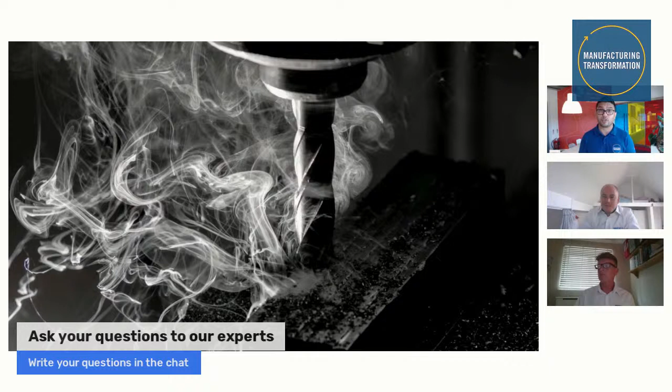So first, let's try to understand how to identify some of the important issues while manufacturing complex parts. To begin with, from my experience, I'd like to share 4 important recurring issues when machining complex parts. Nobody likes to see smoke while machining complex parts, so let's get into the issues as quickly as possible.

The very first issue I've identified is not meeting expectations. Focusing on the machining or entire manufacturing process, we have a number of stages, right from the design department developing a CAD part and handing it over to the production engineering team, where they define the process, do the programming, post the right codes to the machine, and finally cut the first part.

During these different stages, we have to make sure there is something called trend knowledge that is required to fill the gap. Sometimes we are adapting traditional knowledge or methods for machining complex parts, and that could be one of the major reasons for not meeting your expectation.

As I mentioned about the different stages, if you are not making a connected process and not bringing that agility, a very obvious issue I've observed is a lack of efficiency. This is a very common issue when we don't see the connectivity between these different stages.

With today's pandemic situation, everybody is under a lot of pressure to control costs, and your customers are also looking for technologies they would have expected only after 5 years. I think this is a time everybody has realized we have to adapt this quicker. With these pressures, cost is becoming one of the main factors for every shop floor.

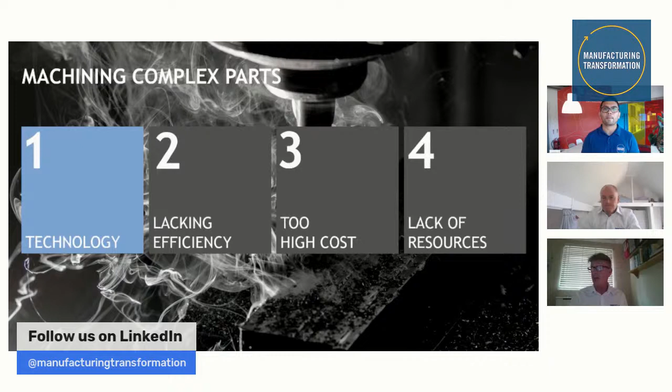Very interesting point, thanks Neil. And I think that summarizes that you need to have the right technology to drive the complex part. And it's very important to understand, as we have this kind of knowledge available in the market, and at the same time when we have this issue called lack of efficiency.

So now I straight away move to Jason. So when it comes to machining a complex part, how important is it to identify this issue, and what is your recommendation to overcome this lack of efficiency, Jay?

Thank you, Janardhan. Obviously, make the process more efficient. What we're really talking about is optimizing your process. There are many ways to do this, and I suppose the main two for us that we drive for are reducing cycle times and reducing the number of times the operator has to intervene inside the operation.

So by doing this, that can lead to much more robust and stable operations and conditions, which leads to better parts. And if we reduce the cycle times, it also creates more capacity. And the more capacity you have, the more space you have for future developments as well, to improve those tool paths and those setups even further. But it also gives you the capacity to take on more work, so you're making your business more revenue.

And part of this whole process of optimizing is by working with our technical partners. So we're using all our knowledge together to get the biggest gains. Very interesting, thanks Jay.

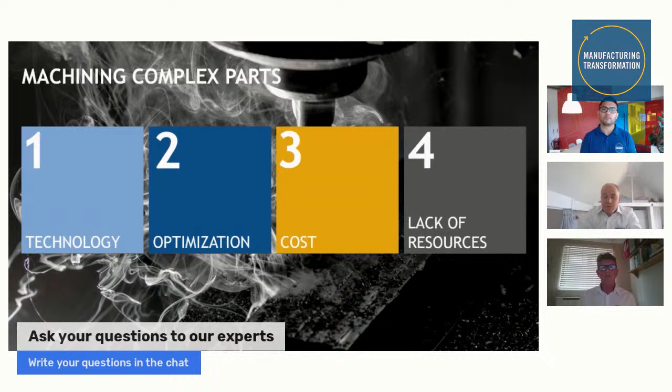And one of these known types of machining techniques nowadays is dynamic milling, and that's where we're using the full length of the tool to actually machine out pockets and areas that are hard to reach at a much higher feed rate, but obviously making full utilization of the tool as well. Good, very interesting, because this plays a very important role in today's shop floor, balancing whether it is pure optimization or optimization that includes cost control as well. Thank you, Jason.

Thank you for helping us with your information. And going forward, addressing one of the important issues of these four recurring issues, that is lack of resources.

I'll go to Neil and ask you this question: what is your recommendation to our audience and customers on how they can find the right resources with today's situation? What are the different ways? Can you please help us with your ideas?

Yeah, it's a good point. I think in the market nowadays, with the customers we deal with, they have limited resources, they're very busy, they're working on projects, and they're relying more on tooling providers like us to develop their processes. This helps them reduce their machining issues. We're collaborating on projects, providing robust machining strategies, and lowering the risk of their persistent manufacturing issues. I think the customer looks at us as an extension of their team, which leads to opportunities for both parties.

I think that's a very important point. We are an extension, we collaborate, and we try to work together to reduce these kinds of issues that they see with complex parts. The key is to have the experience of the customer aligned with a tooling provider and CAM software experts. This knowledge makes the machining process more robust. It gives the customer confidence that they can machine these parts successfully without the risk of high machining, tooling, and quality costs. With the lack of resources we see today, it's very important to have that collaboration and partnership between all parties to iron out these issues right at the beginning of the manufacturing process.

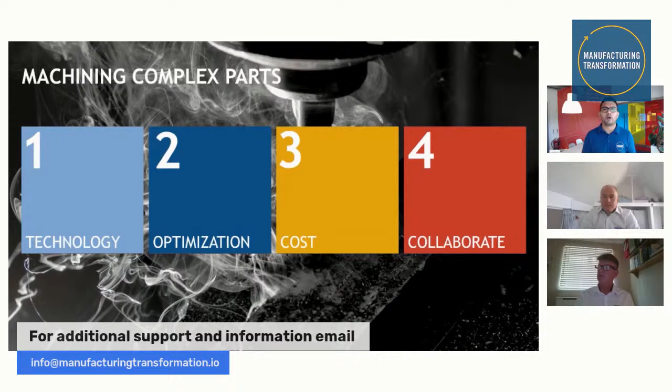So if I want to summarize all these points in 3 simple words, considering the key elements Jason and Neil mentioned: we have to be very agile, quick enough to identify this knowledge available in the market from the source, and adapt it as quickly as possible. You have to be flexible to adapt these kinds of trending solutions. And most important, not just by identifying it — you have to authenticate it from the right resources. As Neil mentioned, you need the right technical partners to validate the knowledge you want to apply on your shop floor when dealing with complex parts.

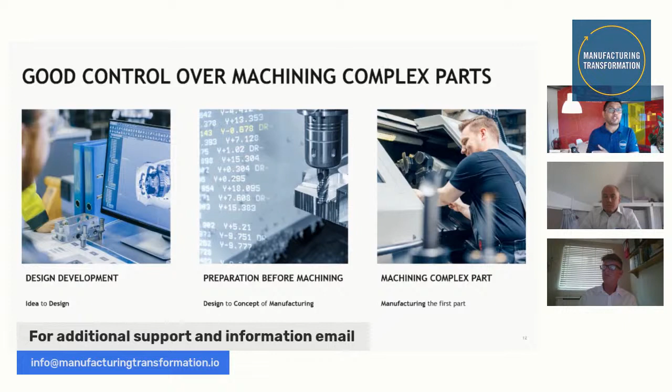I think moving to the next interesting point for everybody is to have more good control on the shop floor, because there are three very important stages when dealing with complex parts. One is the design department developing the CAD part — sometimes not considering where it would be manufactured. The second important stage is the preparation for the actual manufacturing activities. And the final stage is seeing the first part cut, and that wonderful part coming out of the machine.

So here's my question to Jason: what is your experience as an engineering manager and team member of your Innovation Hub? What are your recommendations for the audience? What are the areas they have to prepare and consider before they start this activity? Could you please help us with your additions?

Absolutely. Obviously, you've just mentioned it there — for me, the first point is design for manufacture. You sometimes see parts or features designed where the feature is very difficult or almost impossible to machine, and that could be alleviated right at the start by joining the design team up with the manufacturing team. By getting that, you resolve those issues far in advance of starting the process.

But once you do have that component or feature, you've got to know all your inputs. You've got to control all those variable inputs to know your output will be correct. So things like your machine tool — we need to know the exact setup: is it a 3, 4, or 5 axis? How powerful is the spindle? How quick can the spindle run? We need to know the material, because without the material, we can't select the right tools or the right cut data.

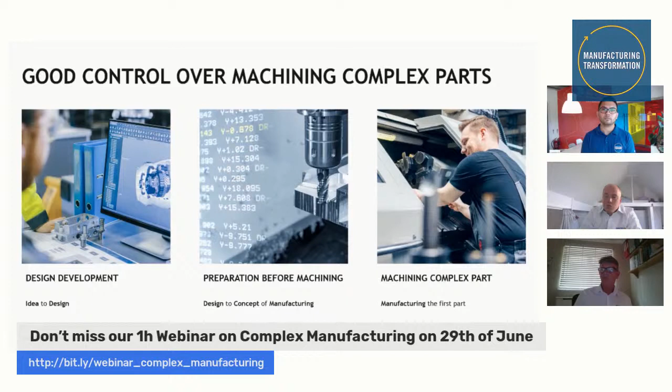Once we're at the point of machining and doing our first prove out, it's very important that we're stood there with the customer or with you, to make sure we can hear, feel, sense what's going on in that process, in that part where the tool's hitting, so that we can make small adjustments, minor adjustments at the time to best suit the actual setup you've got in your factory. Only when all that is done and we've completed all that can we have the best possible chance of having the first part off right first time.

It's very interesting when you said about hear, listen, and feel about what's happening in the process of machining. I think that's where the experience and the skills and knowledge comes into your place. So people like you who have vast experience - I think this is the understanding we have to give to today's shop floor, that it's not just okay to apply the traditional methods you know from a different way, but you have to make sure to apply the right knowledge.

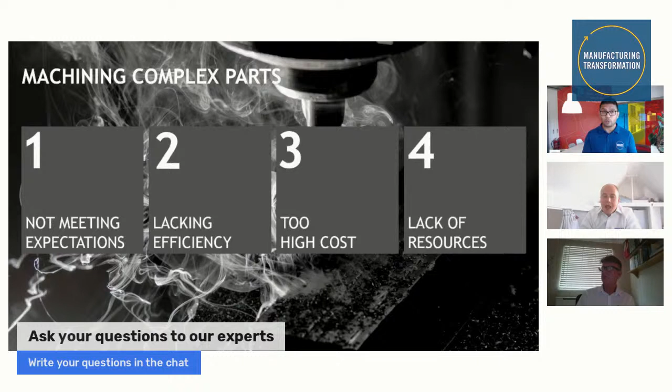So going quickly on the summarizing, just on the recurring issues and key elements we spoke about today - make sure you identify these kinds of hidden issues in your shop floor while manufacturing complex parts. Find them out and get the right source to address these issues, by getting the right elements from the right technical partners.

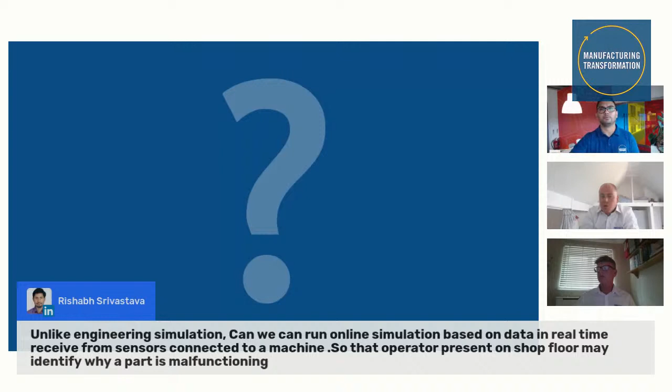So Jay, do you want to add anything on this question? I think you're right, kind of thing. There's two ways to this. When we talk about offline simulation, we're more looking for collisions, making sure the code is correct before it hits the machine. With regards to online simulation, it's more around the forces being applied. So we're always monitoring the spindle or the X-axis ball screw or something like that. That feedback has to, like I said, could be vibrations happening in there. And there are functions moving forward where that feedback loop is going through to actually change the feed or the speed through the machining process at the time. And that's really innovative at the moment, and inspiring as well, to say that you can actually change feeds as you're running a part to make sure you get a better component at the end.

Yeah, I think that's a great point, Jason. And another point from myself is the collaboration with the machine tool builder. A lot of these machine tools, we all know the most expensive parts on these machine tools are the spindle. And if we have robust data and tool life calculations that we can feed to the machine tool builders, they can set the parameters on the spindle for loads. It's much more important for the tool to be stopped before a collision or before the insert wears out, because A, you're not damaging the tool, B, you're not damaging the component, and C, you're not damaging the spindle of the machine. So there's some great collaboration there. We work very closely with the machine tool builders on projects, especially when machining super alloys.

Absolutely. Good. Thanks, Neil and Jay. I think I'm reading one of the comments here. I don't see it as a question, but still I would like to read that comment.

Need more knowledge exchange from tool manufacturers, as the tool manufacturers can be the major resource to share tool and program strategy. There need to be also more practical short case studies, videos which can be shared to the small and big shops.

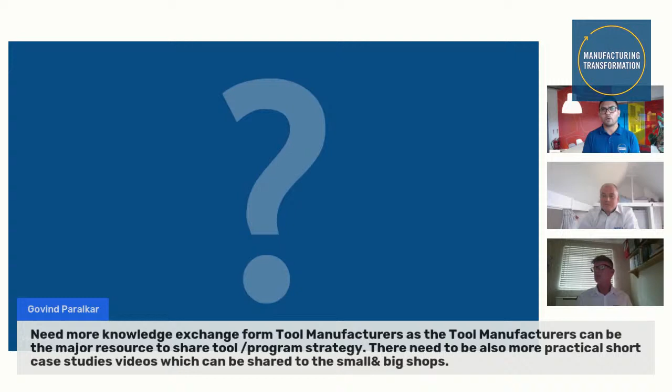Very valid point. That gives me another thought to share with the audience: most of the time we just conclude by saying tooling suppliers, but since we are developing those tools, it is more than tool that we can help and support customers. So it's a very right way of understanding where the knowledge is coming from. Really, thanks, it was a really interesting comment. So moving to the next question.

Again, I think it's a comeback question to Jay. Thanks for answering the question on superalloy material machining. Could you share technology trends on machining composite material?

Obviously, the composites market is fast growing, we know it's going to be bigger and bigger as the days go on. We do have a big development on composite cutters. We did a demonstration last year at our ITI event, showcasing PCD on composites, as well as our latest carbide cutters. We are now looking at the next phase: how we can introduce a certain type of MQL, minimum quantity lubricant, into machining composites that can increase tool life even further. Obviously we're always developing, but that's the next stage. It's very early at this moment, but we are seeing some positives in that area.